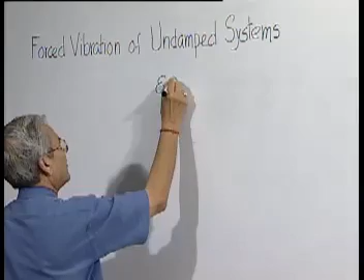So excitation of a system can be of various types. First of all, we will classify the situations according to the nature of the forcing function or the disturbance. If the forcing is purely a harmonic function of time, like say if we call this the force, so this is called harmonic excitation, because the excitation, the function of time, is a harmonic function of time.

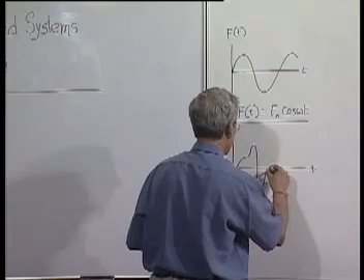But before that, we should classify in general, excitation as periodic, that means the forcing function is a function which repeats itself after a fixed period. So this kind of excitation which repeats after a fixed time, which we call time period, is called periodic excitation.

Another kind of excitation can be aperiodic. Aperiodic excitation can be anything like this, which does not repeat itself after a definite time, that is called aperiodic.

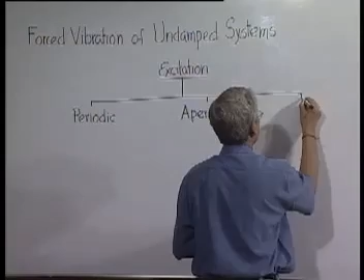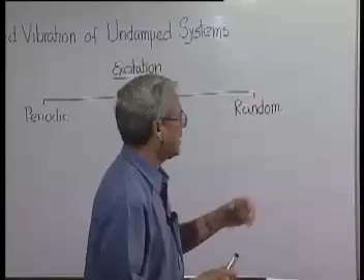And there is a very special case which we will not be able to discuss, but nevertheless very important, called random. There are many cases where the excitation is of random nature, which has certain special characteristics. What is random? But we will not go into those things, because we will keep our discussions to the simplest possible situations.

However, this periodic excitation can be further classified, as I was mentioning initially, into a case called harmonic, the other anharmonic. Say the second one, it is periodic, but it is not a simple harmonic function of time.

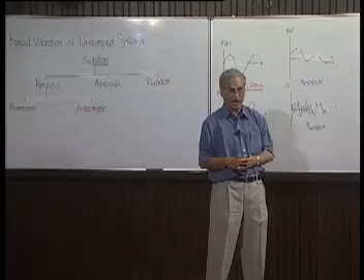The classification of excitation can again be done from a different point of view. Here we have been doing it from the point of view of the nature of the excitation as a function of time. The other way of looking at the classification problem is what is the manner in which it is excited.

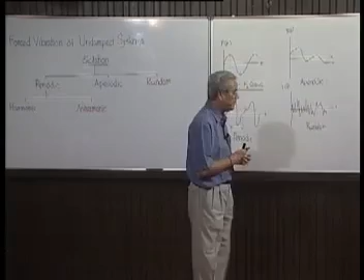For example, I can take this and try to vibrate it by applying a force. Sometimes a system can be oscillated or disturbed by applying some kind of disturbing motion to its support or the wall to which it is connected. Sometimes a system vibrates by itself, and the only thing we have to supply is a source of energy. Sometimes it is excited by a periodic variation of one of the parameters, either stiffness or inertia or something. So there is another way of classifying excitation.

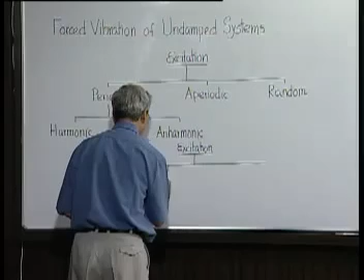Based on the fact of where from or how it is being excited, we can have force excitation. The other one, where the support on which something is resting is oscillated, that is called base excitation. Another one is self excitation. And there are cases, of course, which we call parametric excitation.

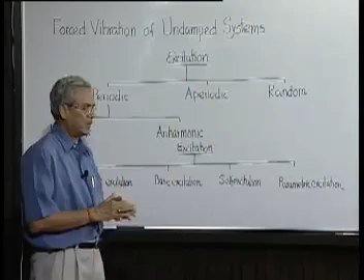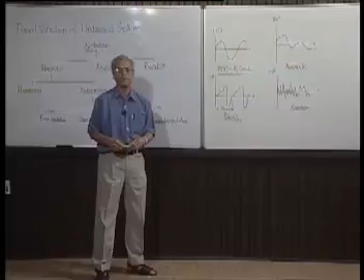Our problem of forced vibration can be any kind of combination - it can be a periodic anharmonic base excitation problem. So what we should do, as always advised, is take up the simplest possible situation. We have taken the simplest system, an undamped single degree of freedom system, and for excitation we will take the simplest case: harmonic excitation, given in the form of either a force or a moment. Another reason harmonic excitation is important is that any periodic function of time can be represented as a Fourier series, where each term is a harmonic function of time.

As we are dealing with linear systems, if a particular forcing function f1 gives response x1, and another forcing function f2 gives solution x2, then when both are combined, they give the response x1(t) plus x2(t). This is a very important result, but valid only for linear systems. So if a periodic function of time can be split into a series of harmonic functions of time, then for each harmonic function we can get the response, and the resultant response will be the sum total of all the responses.

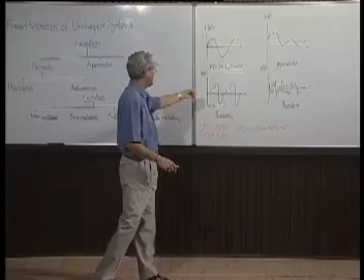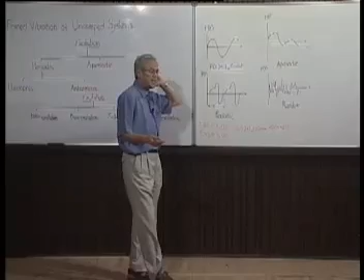So if we know how to solve the problem for harmonic excitation, we can solve for all periodic functions of time. Even aperiodic functions of time can be represented using an infinite Fourier transformation, where instead of discrete frequencies, the frequency spectrum is continuous - we will see such cases. But the conclusion is that even this problem can be solved using the system's response to a harmonic function, because this can also be represented in terms of harmonic functions using Fourier transformation. So if we are handling linear systems, knowing the response to harmonic functions of time can give the result for any type of forcing.

With this little introduction, let us solve the problems one by one. First we will take up the case of an undamped system with single degree of freedom, which is excited by a force that is a simple harmonic function of time.

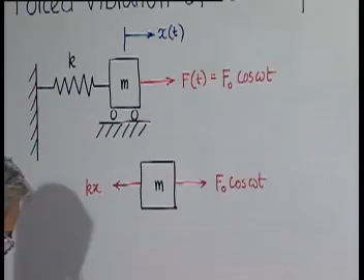It's a very simple problem. Let us find out the expression for x, the response of the system. At any instant of time, the forces acting on this system will be kx. So total acceleration in this direction, x double dot multiplied by m, has to equal the total force in that direction.

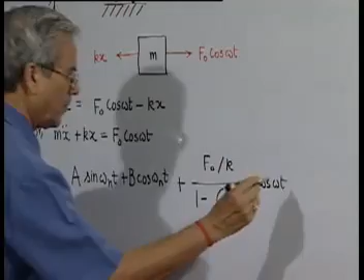This is the differential equation we have to solve now, and we know the general solution will have two parts: one is the complementary function, the solution of the homogeneous part of this equation, m x double dot plus kx equal to 0, plus the particular integral, which we have to find for this case. The complementary function, the solution to the homogeneous part, we already know from our previous lectures. So this is the complementary function and this is the particular integral. Here omega n is again the natural frequency of the system.

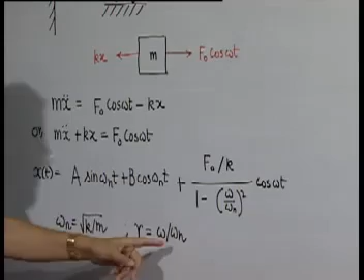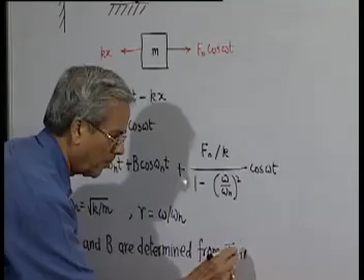We also define another quantity R, the frequency ratio, given by the ratio of the forcing frequency to the natural frequency. Now these constants A and B will depend on the initial conditions - meaning what is the starting velocity and position.

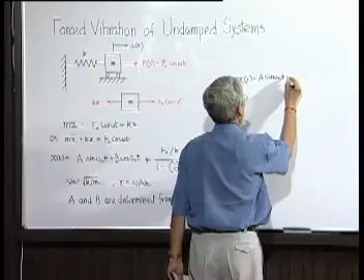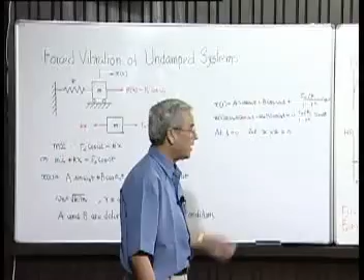So let us now try to solve this problem. We know x(t) is equal to A... so x dot (t) will be... and let us consider a relaxed condition to begin with: at t equal to 0, let both x and x dot be equal to 0. This is something possible in forced vibration - in free vibration, if we give initial conditions as x and x dot both zero, the system will continue to remain at rest. But since now we are disturbing the system, it will oscillate.

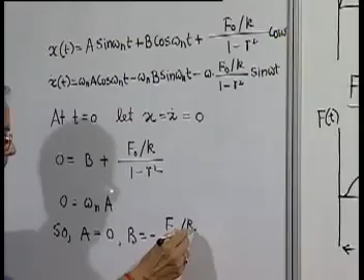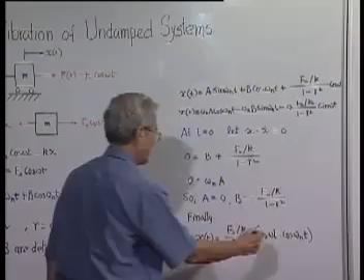So putting this in, what we get is 0 equal to B plus... and if we put t equal to 0, x dot equal to 0, we get 0 equal to... So the two conditions give us A equal to 0 and B equal to minus... and the solution becomes... this can be written in a slightly different form.

This is pure trigonometric manipulation, so this is our final solution that shows how a perfectly undamped single degree of freedom system will respond to a purely harmonic forcing function like this. So let us plot it.

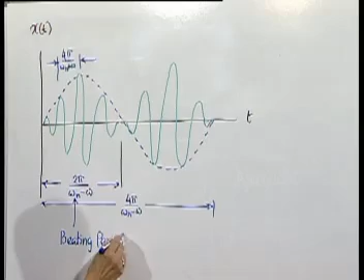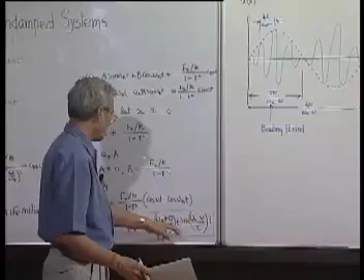Now one thing we see: suppose what happens when we start from a low value of omega. Omega is nearing 0, that means r is nearing 0. So this will be approximately 2f0 by k, and this will be approximately sine omega n by 2, and this will be more or less the same.

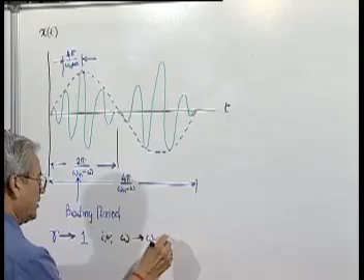But what we find here is that as omega increases and approaches omega n, when r approaches 1, what happens to the beat frequency? Since beat period is 2 pi by this, the beating period will approach infinity.

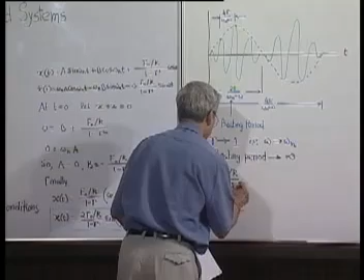Another thing we find is that the amplitude, the maximum value to which it fluctuates, depends on this quantity. And here when r is approaching 1, this is gradually exploding, and the amplitude, which depends on this, also approaches infinity. So therefore, if we want to plot this under this situation...

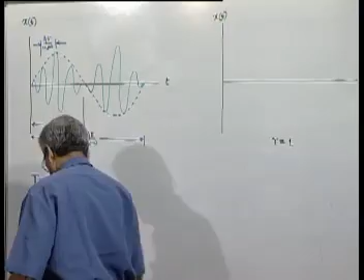This is a case where r is equal to 1. What we will get? It can be shown this angle is tan inverse of... and of course this is still...

So now we find that when r is equal to 1, in that particular case, the beat period is infinite. That means it never comes back, it keeps on increasing. The maximum value to which it reaches also keeps on increasing, and it can be shown mathematically—we will not go into those things—that this amplitude will keep on increasing linearly, and the rate of increase can be decided by this angle of the tangent.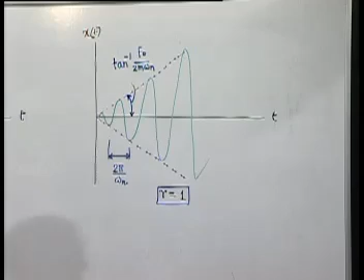So this particular phenomenon means that if such a system is there, it will keep on increasing in its oscillation amplitude indefinitely, and that is what we call resonance.

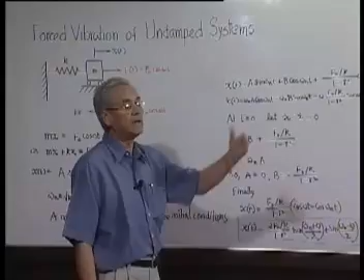That is why we should remember our earlier caution that when a forcing function is acting, we should be careful that the forcing frequency never really goes anywhere near the natural frequency of the system. That is why when something is being designed, its natural frequency should be estimated, and it should be ensured that the system is never subjected to a kind of forcing function or excitation where there is a chance of resonance.

These are the kinds of things you have perhaps heard: when a military marches through a bridge, left right, normally on solid ground they keep marching all in unison, meaning everybody is in phase. But once they cross a bridge, they are always told not to be in phase or unison, and they are not supposed to march in step—they walk through it—because if hundreds of soldiers keep marching with the same frequency and same phase, the forcing function will be enough to match the natural frequency, or at least go somewhere near the natural frequency of the bridge, and it can cause disasters.

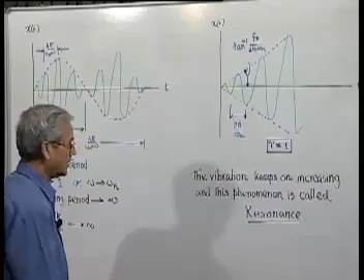And therefore this is the point we wanted to make. But the common view sometimes held, that if resonance takes place the amplitude of vibration becomes infinity, is not so. Actually what happens in resonance is that the intensity of vibration keeps on increasing indefinitely. If you allow infinite time, and if the system is capable of taking infinite deformation, it will go to infinity. But really what happens is that the system gets damaged because of large scale oscillations taking place.

However, this is a very idealistic situation, because in nature it is impossible to make a system which is absolutely free from any energy dissipation.

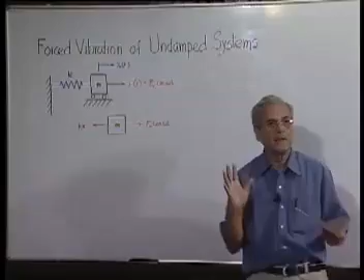Therefore, to make our analysis somewhat more realistic, even if we consider the system to be notionally undamped—that means we do not show a specific damping agent or damper—we still have to keep in mind that there is certain amount of dissipation. It may be very small.

In reality, even the very minute amount of damping present in a system will damp out the complementary function, or the free vibration part. And this is how the response will look.

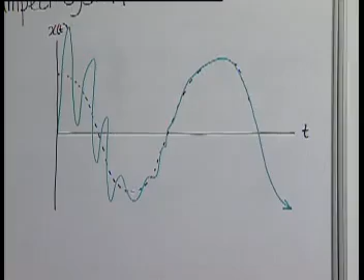Of course, I have shown this takes a short time, but in reality it may continue for a large time. Eventually, the initial free vibration part—that is the free vibration part—will gradually damp out.

What will remain is only the particular integral. So the response in the steady state situation, that means which will keep on maintaining its nature and character, is called the steady state.

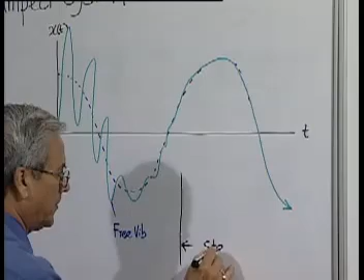In steady state, the solution or x(t) is only the particular integral part, because the natural vibration part, which was represented by the complementary function, has gradually died down.

That is the response, and this is what we call transient—it is a passing phase, so this does not repeat itself. After it reaches the steady state, there is no further change, and there the response is this.

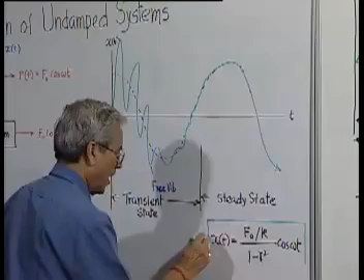So in general, our primary concern is the response of a system in the steady state, which in this particular case happens to be this—of course, R is not equal.

Now you see this f0 by k: here the forcing function is cosine omega t times f0, and the response is also similarly some quantity into cosine omega t. So therefore, if we plot this in the steady state, the response will look like this.

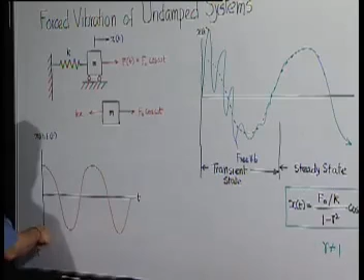If we plot both x and the forcing function on the same graph, it will look something like this, where the magnitude of this is f0, and the magnitude of this is f0 by k.

This is the situation when R is less than 1. When R is more than 1, then what will happen?

In this case, x will be like this. I want to keep this always a positive quantity, so we can write this as r squared minus 1 and take a minus sign here, and we can write this as so—therefore, the forcing function and the displacement response will be just out of phase.

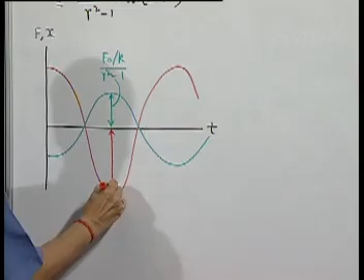So, when the forcing frequency is above the natural frequency of the system, that is R is more than 1, then the response will be out of phase by 180 degrees, or pi, as indicated in this.

Now, this quantity f0 by k—what is this? This is nothing but the static deflection if I apply this force, f0, statically. So f0 by k is the displacement of the mass from equilibrium if the same load is applied in a static way, not dynamically.

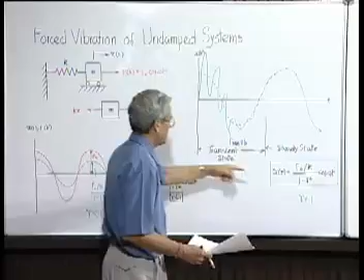On the other hand, if the same force is applied dynamically, the deflection or maximum deflection is nothing but the amplitude of oscillation, which is f0 by k divided by this quantity. So for this ratio, the amplitude of oscillation is nothing but this,

divided by the displacement which is static when the force is statically applied. Taking its magnitude only, that is x divided by f0 by k magnitude, and this is nothing but, as can be seen here, x divided by f0/k is nothing but 1 by 1 minus r squared.

This is called M, or the magnification factor.

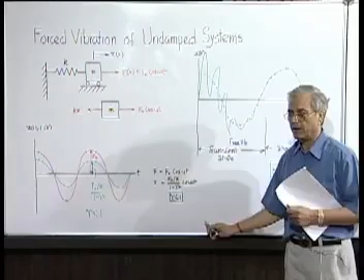It means that when a load is applied dynamically, the displacement of the system gets magnified compared to the situation when the load was applied in a static manner. Now, how does this magnification factor look like?

This magnification factor, when we plot it as a function of r, it starts at r equal to 0 with magnification factor 1, and at r equal to 1, it shoots up to infinity. When r is more than 1, it becomes negative, but we take only the mod, so it becomes positive, and it asymptotically approaches 0 as r tends to very large values.

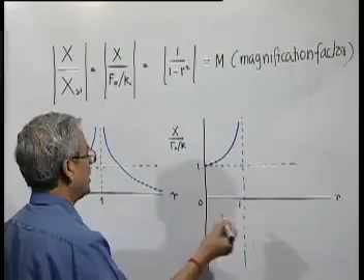Of course, if we just want to plot the ratio of the amplitude with the static deflection, then when r is less than 1, x is positive and this quantity is positive. But when r is more than 1, x is negative because this quantity is negative. But if you take the mod of this, then we get back the same curve.

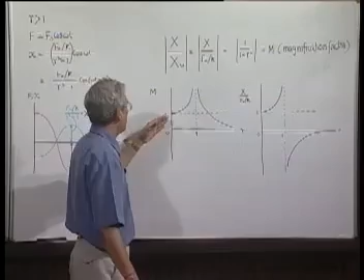So this is called the steady state response of a single degree of freedom undamped system, whose response characteristics are indicated by this plot, where the magnification factor or amplitude at a particular frequency is given for the whole range of possible frequency ratios. This is the simplest situation which we have discussed.

Next, to take up more realistic cases, we will now consider a viscously damped system and subject it to a harmonic force. So we will take up a case where there is a certain amount of viscous damping present, and again subject it to a simple harmonic function of time as the force, the harmonically excited system.

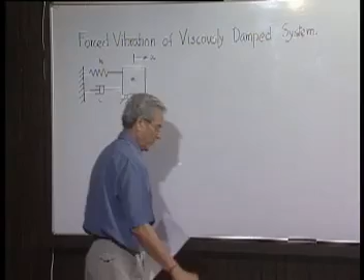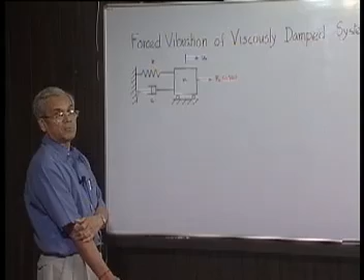This is the situation: our lumped parameter model with viscous damping, stiffness, and mass subjected to a simple harmonic force, a harmonic function of time f0 cosine omega t. The equation of motion we can write without going into the free body diagram again. It is going to be now not 0 as in the case of free vibration, but the external forcing function.

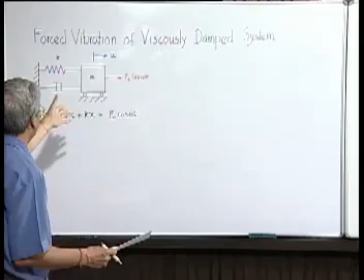Now, we have seen, and we can keep in mind, that any kind of response of a simple system to a harmonic function or harmonic force like this will also be a harmonic function of time with the same frequency. This is a principle you should keep in mind: the response to a harmonic force will be a harmonic function of time with the same frequency.

That is the only thing you have to keep in mind. But before we go further, we will write it in a slightly different form, dividing the whole thing by m.

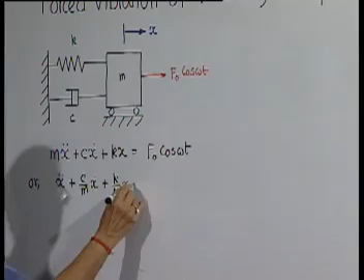Now, C by m can be written as C by Cc, the critical damping coefficient, into Cc, which is nothing but 2 root Km by m in this particular case, and that is equal to zeta, the damping factor, into 2, and root over Km by m is nothing but root over K by m, that is omega n. Similarly, K by m is omega n squared.

So this equation can be again written in this form: x double dot plus 2 zeta omega n x dot...

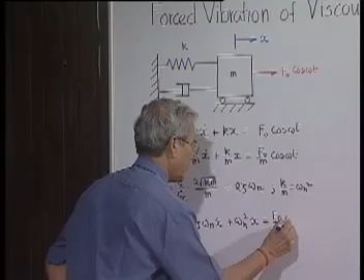Now, this solution we can always write; let the solution be a harmonic function of time with the same frequency, that is all. So we can write x equal to capital X, the amplitude, cosine of a function of time, a harmonic function of time with the same frequency, but there is no guarantee it will be at the same phase. So we cannot write cosine omega t here; rather we write it with a different phase.

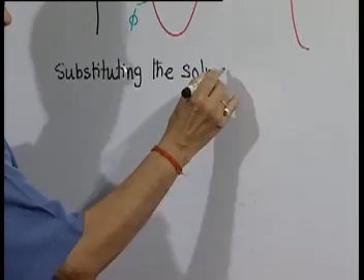So, substituting the solution in equation, what we will get is x double dot. If we differentiate this twice, what we will get is minus omega square x cosine omega t minus phi, into, there is nothing else. So, therefore, this will be the first term, plus

minus twice zeta omega n omega, this is x dot, multiplied by 2 zeta omega n. X dot is minus omega x sine omega t minus phi, and we have multiplied, plus

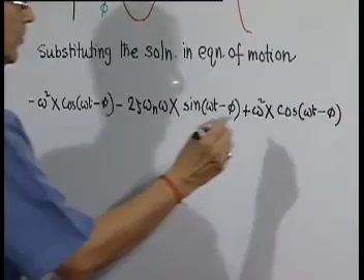and this is equal to... so therefore, we have converted the differential equation into an algebraic equation, but we have to solve for two quantities, one is x, other is phi.

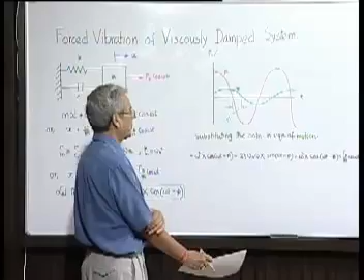The technique is generally that we will see on both sides of the equation, the coefficient of cosine omega t on both sides must be same, and the coefficient of sine omega t on both sides of the equation should be same. So if we split this, what we will get is minus

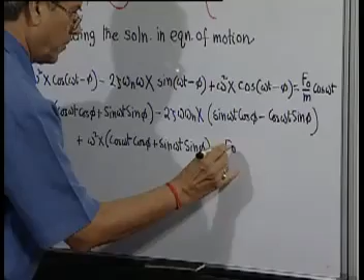Now, if we want to equate the coefficients of cosine omega t on both sides, what will be the coefficient of cosine omega t on this side? It will be minus omega square x cosine phi, plus 2 zeta omega omega n x sine phi, plus omega n square x cosine phi. This is the coefficient of cosine omega t on the left hand side, and that must be equal to the same on the right hand side, which is F0 by m.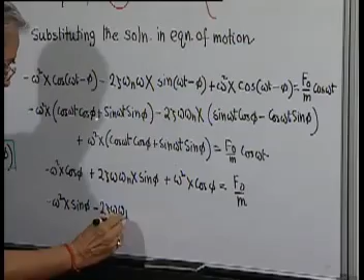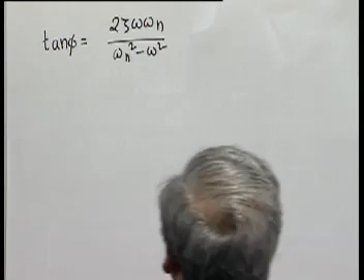Now again we have to equate the coefficient of sine omega t. And the coefficient of sine omega t on the right hand side is 0. So from this we get, if we take sine phi and cosine phi, we get tan phi is equal to 2 zeta omega omega n by omega n square minus omega square, and if we divide the numerator and denominator by omega n square, what we get is 2 zeta r, that is the second equation.

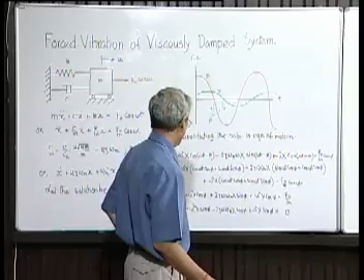The first equation will tell us x is equal to... so we take x common and divide f0 by m by the coefficient of x. So now if we take cosine phi common outside, we get f0 by m by cosine phi. If we take 1 by cosine phi, it is omega n square minus omega square plus 2 zeta omega omega n. So tan phi is already determined, is 2 zeta r by 1 minus...

Now cosine phi we can easily find out. Cosine phi is equal to 1 by sec phi, that is 1 by square root of 1 plus tan square phi. Now tan phi has been already determined, so if we substitute this here again, finally x we will get as... after simplifying we get this. So this is the response.

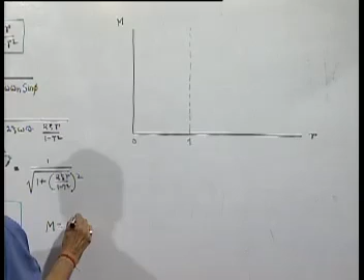Magnification factor again we define the same way, as x by f0 by k. And as you can see, when r is tending to 0, then it is simply, this is 1, this is 0, so it will be 1. This way

Now of course you have a parameter like zeta. For different values of zeta, we will get different response. So zeta is increasing in this, and this is zeta equal to... Similarly, that is so far as the magnification factor.

Phase difference characteristic. So if zeta is very small, it will be like this. Now as zeta gradually increases, and so on. So zeta increases, and this is the case when zeta is 0.

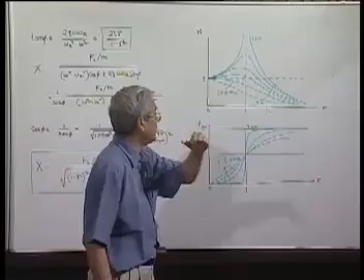So the frequency response characteristics of a viscously damped system is like this. Now it depends on the magnitude of zeta. The peak value is now restricted, it is no longer infinity. Even at omega is equal to omega n, it is no longer infinity. And the peak value is also not coinciding with r is equal to 1, gradually it is shifting.

And for zeta is equal to 0.707, the peak value of the response is at r is equal to 0. That we will prove later. So therefore this is the general characteristics. Here again we find the phase difference is always 90 degree at r is equal to 1, and it is asymptotically approaching pi. So

This is the situation. What we will do next is to look at this problem from a different angle using a different approach, which we will be taking up in the next discussion.